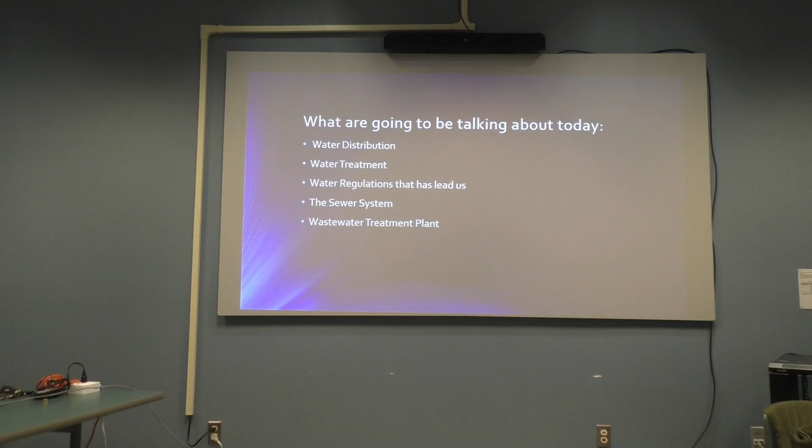So what are we going to talk about today? We're going to talk about the water distribution system, the water treatment, water regulations that's led us, the sewer system, and the wastewater treatment plant.

How does it work? Magic. Thank you guys for coming out. We'll sit down. Okay.

First thing we're going to start off with: there is no new water. I always relate this to land.

Growing up, my grandmother and Jim Wilford always said, buy as much land as you can. God isn't making it anymore. It's the same thing with water. There is no new water. There's water associated to land, so you can buy the water rights, but there is no new water.

So this is a very basic overview of the water cycle, and we're going to go through it. You'll see that we do not have surface flows that come down. We are predominantly groundwater. But this is the complete water cycle. Again, there is no new water.

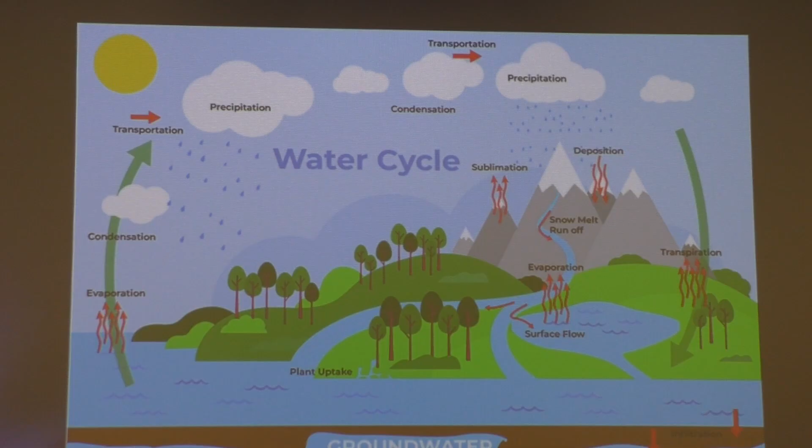How much water does Rosamond use? We are projected to use 2,400 acre feet a year. I'm a very visual person. Somebody tells me that, I have no idea what that means.

So let's do the math. An acre foot is 325,851 gallons of water. So if we do the math, that's 782 million gallons of water. That's a lot of water, but I still don't quite understand how much water that is.

That's enough water to fill the Rose Bowl 9.25 times. And that's what our town uses in a year. Where does our water come from?

Like I said, we use predominantly groundwater. So the aquifer is between the surface and impenetrable rock, and it comes up through wells. This is very basic, I did not go into great detail. We're going to keep talking about this.

We also, down at the bottom, a little asterisk - there's always asterisks. In the case of emergencies, we do have access to Antelope Valley East Kern Water Agency, or AVEK.

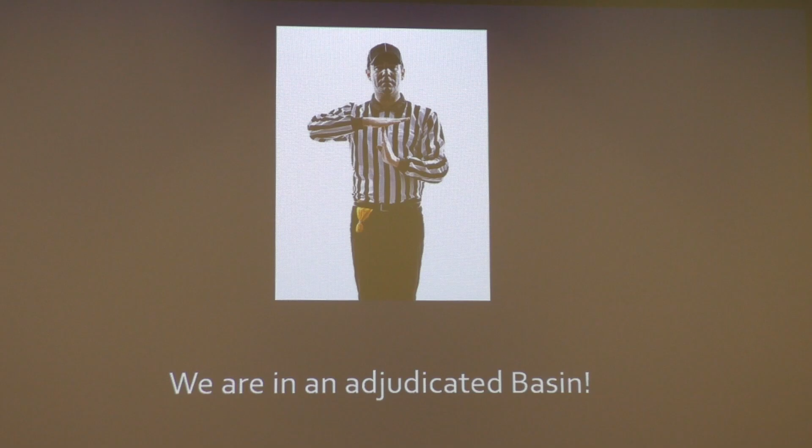Time out. We're an adjudicated basin. What does that mean? People have read about it in the papers. We're not getting political, but we're going to talk about it real fast. What is an adjudicated basin?

In 2015, the AV groundwater basin was found to be in overdraft. That means we were taking more water than we were putting in. So the water levels were going down. Some people's wells weren't deep enough anymore - the water was not going to the bottom of the straw.

Reduce historical groundwater pumping to sustainable production rights. Pre-adjudication, we were anticipating using 2,400 acre feet. At the end of the judge's ruling, we had 404 acre feet. That's how much water we were allowed to take out of the ground. So we were in a deficit - we didn't have enough water.

And it's a ramp down period, which means at this point you're going to start going down to this point. Good frame of reference.

Again, I work for Lancaster. 404 acre feet is almost the exact same number they have just for the soccer field out in Lancaster, for that big soccer complex on 30th East. So our whole little town was supposed to use as much water as they use for watering soccer. Doesn't make sense, but there's a reason to it.

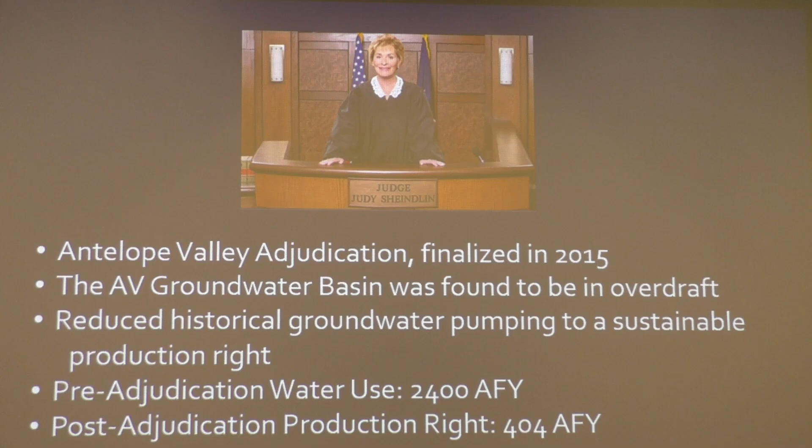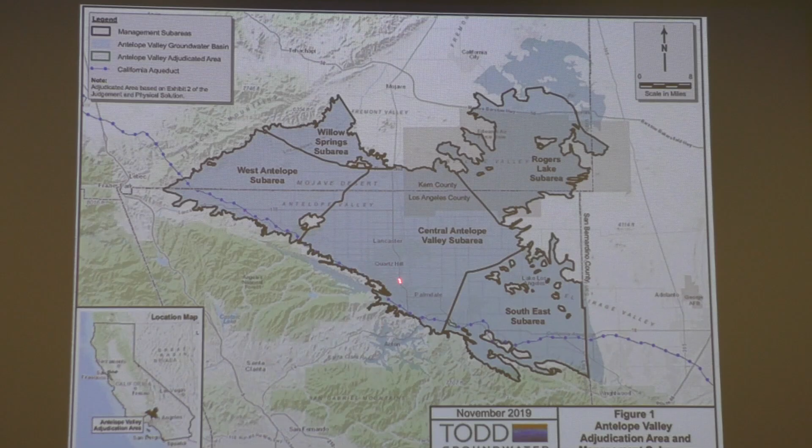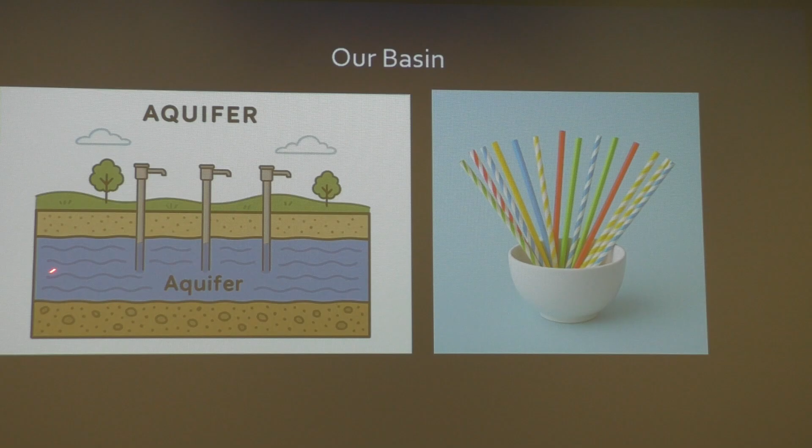So what is our basin? It's pretty much - oops, let me go back - it's pretty much a bowl, and everybody that's pumping water out has a straw. This is our aquifer. Every straw that's coming in is taking the water out.

Did you know, like I said, Rosamond had only 404 acre-feet of water rights? At the end of all of our totals, we were only allowed to pump 668, so we were in a deficit of 1,732 acre-feet.

So that means the magic wasn't going to work at some point. Your faucet wasn't going to come on, you try to flush the toilet, there'd be no water to push it down. So we needed to do something about it. But we'll get to that.

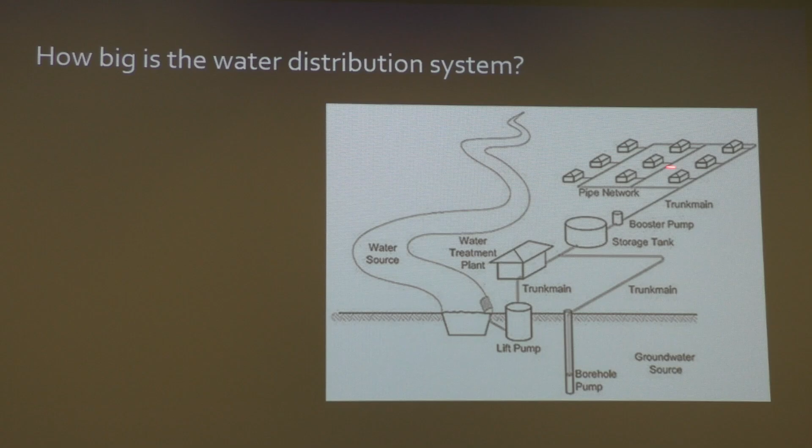This is how the water distribution system works. It's a very basic drawing to understand. Now, you'll see it does show a water source. We really don't do that here, but we do have wells, and then it goes into the treatment plant - we actually don't do a treatment plant here, I'll explain that later. It comes in, goes into our storage tanks, booster pumps, and goes out to your houses. So like I said, we have 103 miles of pipe and 5 tanks.

So this is a part of a pump, or a well. This is how we get the water out of the ground for you guys. You'll see this is the motor on top. It turns the shaft. This brings the water in through the sandy aquifer. So this is your aquifer here. The water comes through, and this spins, sucks the water up, and comes out.

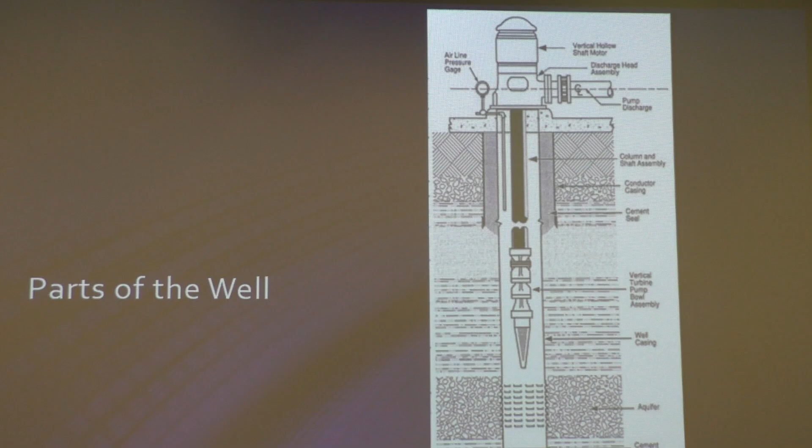And this is a casing. This is a sanitary seal. It's about 50 feet deep, and it goes on each side. It's so that pollution and stuff can't come in through the top and make our water nasty while we're pumping it out. We have 2 wells.

Well number 9 is the main well. It's the well that's doing most of the stuff, supplying most of the water for Rosamond. It was drilled in 2005. It's 520 feet deep, and it has a 16-inch casing, that's a 16-inch diameter, and it does anywhere from 800 to 1,550 gallons per minute.

The thing there says VFD, which means variable frequency drive, and it's just kind of like turning your faucet on. Do you turn your faucet on full blast, or do you kind of ease it on? Depending on what we need, how much water we need, we can set the pump to come on high, half, whatever it is. So it's a variable frequency drive. It's so the power doesn't go from 0 to 100, we kind of ramp it up. And this one is located at 58th Street West and Gaskell Road.

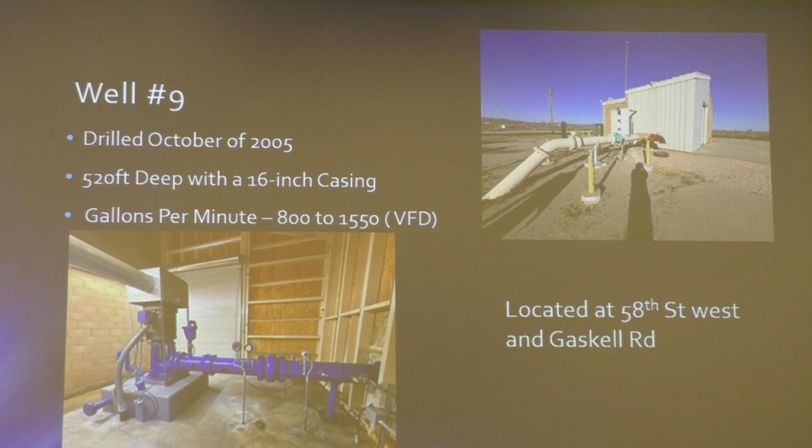This one is well 8. This used to be our primary well until we got well 9. This one was drilled in 1993. It is also 520 feet, similar to the other one, and this one's a little bit smaller. It's got a 15.5-inch casing, and it's 600 to 1,200 gallons per minute with the VFD. This one's at 47th and Gaskell.

Now, this one is only used during peak demand. What does peak demand mean? It's only used during the summer when people are watering their grass and playing on the slip and slide and everything. For 9-10 months out of the year, well 9 can handle the whole system. But when we get in the heat of the summer and everybody's watering their grass, we have to turn this one on.

What is treatment? So we do treat the water, but it's not like a treatment plant. We actually use chlorine injection, which is actually bleach, and it treats the water. To explain what that means: we dose the chlorine for disinfection. The demand is how much chlorine is used for disinfecting in the disinfecting process, and the residual is how much chlorine is remaining to prevent bacteria growth. So we have chlorine at both pumps, and when it comes in, it cleans the water as it comes through, and then it also goes all the way up to each end of the water center, and it keeps the water clean as you guys are using it, so that if water sits there for too long, it degrades and can grow bacteria. But since we have chlorine in there, it keeps it clean.

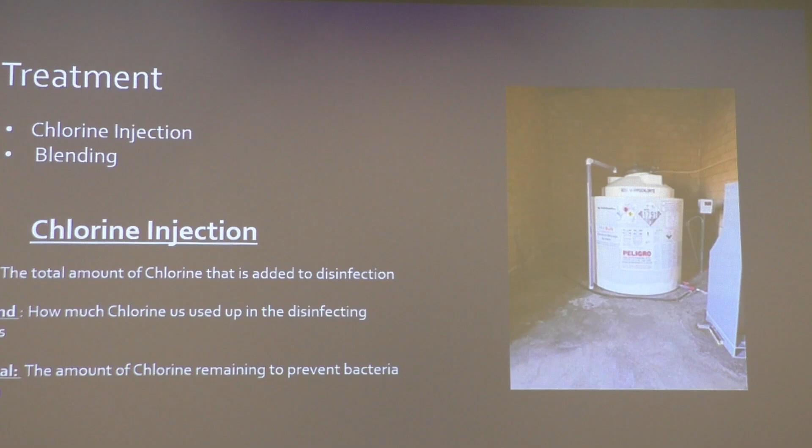Nobody's busting their pillows out or blankets falling asleep yet? I'm trying, guys. Okay, so here's one that I got to explain.

This one is called blending. It is a part of treatment. What it means is if your water, like this well, is high in some level, some form of bacteria, arsenic, or another one we're going to talk about in a minute, but this one's low, you can blend them to achieve that goal. So we do actually do blending when well 8 comes online, because it's an older well, so it's higher in other levels, but it blends with well 9 to meet the state requirements.

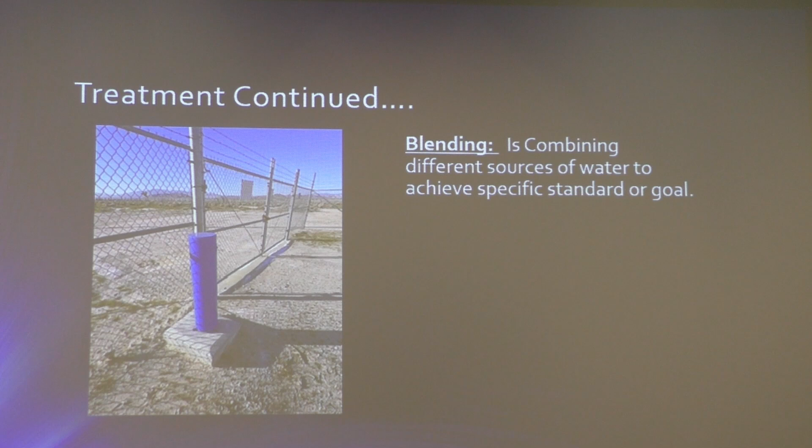Here's going to be the good one. Who got the letter in the mail about chromium-6? Okay, everybody got it. And not just Rosamond, Quartz Hill, Lancaster, Palmdale. I'll explain it. So everybody sees chromium-6, and this is what they see. They see Erin Brockovich, we're all going to die, there's cancer.

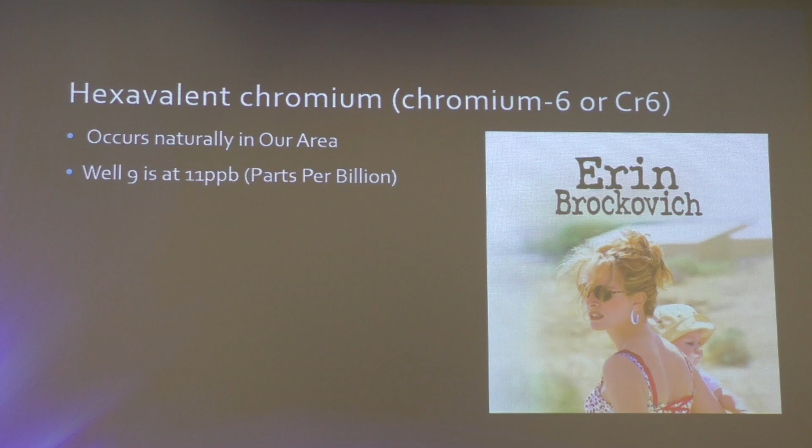Actually, in our area, chromium-6 occurs naturally, at 11 parts per billion. So out of 1 billion parts of water, 11 of them have chromium-6. Hinkley was at 580, and that was due to pollution, not naturally occurring.

California has changed their MCL from 50 to 10. So until last year, we were completely compliant, no problems. Now we're 1 point above. The EPA, the federal level, is at 100 for chromium-6 and chromium-3. So if we weren't living in California, living anywhere else in the United States, we'd be fine by a lot. But you know how California is.

They go to the extremes. My suggestion would be do your own research and look into it.

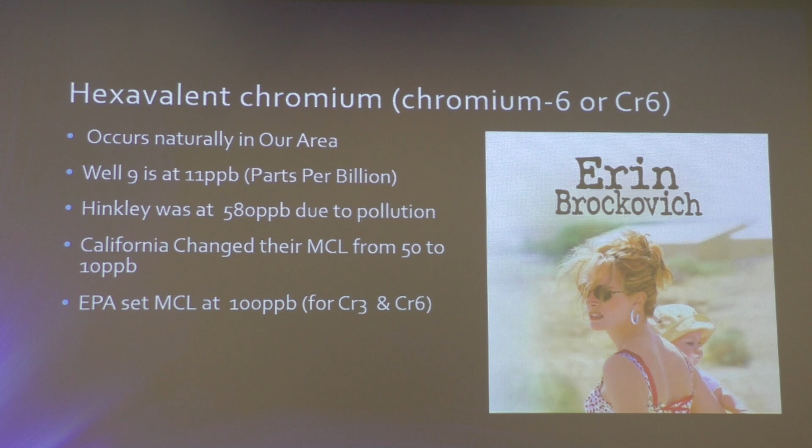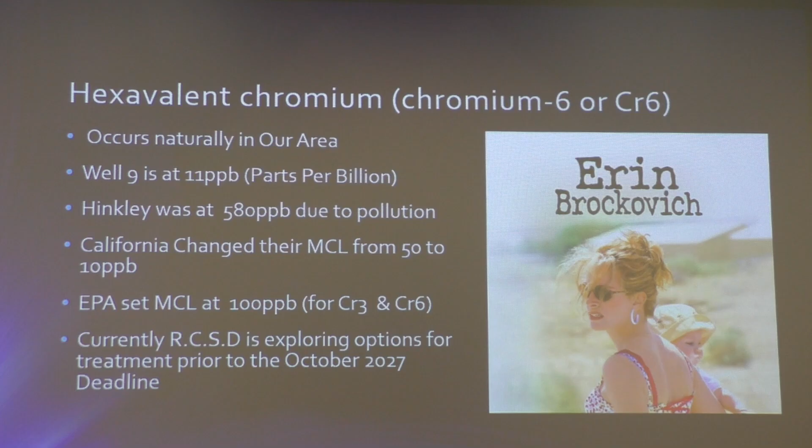Currently, RCSD is exploring options for treatment prior to the October 2027 deadline. So we are in compliance, and we're working towards that being at least 1 point lower by October 2027.

And then you've got fire hydrants. Fire hydrants are not on meters, because it's against the law to meter fire hydrants.

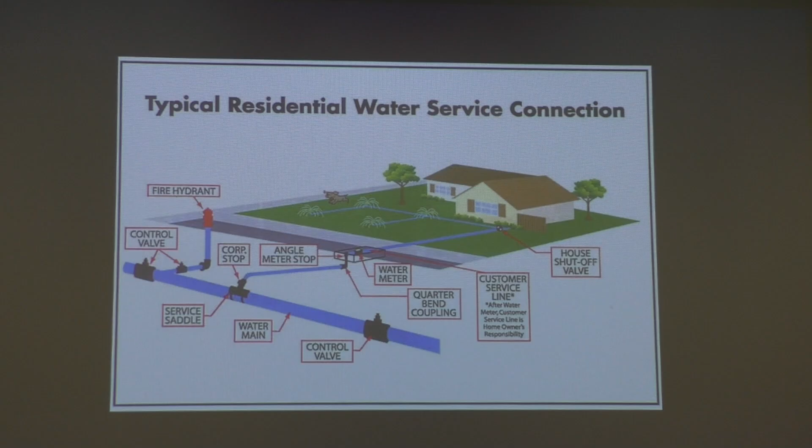The next one I'm going to talk about is your service line. Those are generally either copper or poly.

So if you're driving down the road through a neighborhood and you see that square patch in the road, like some asphalt that's different than the rest, that means there was a leak. Either something damaged it, like foreign material from during construction of the housing project, or somebody was digging in the street to run a power line, since we don't have fiber optics here. They can hit it, or backfill with dirty dirt, which works its way loose as trash trucks drive over it, cutting a hole in the line and causing a leak. So we either have copper or poly service lines.

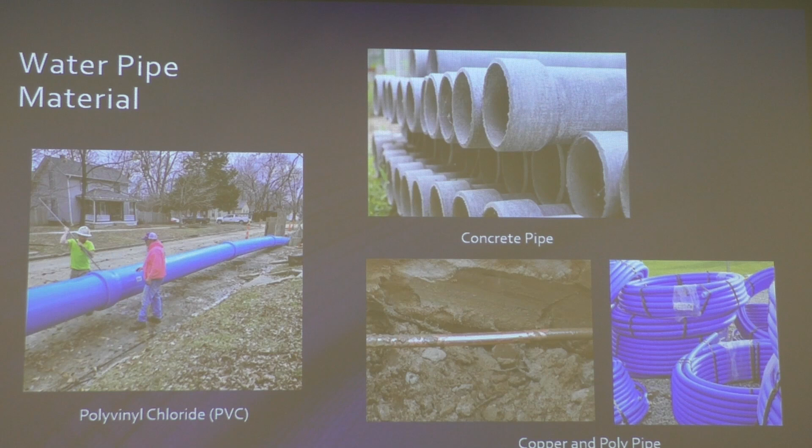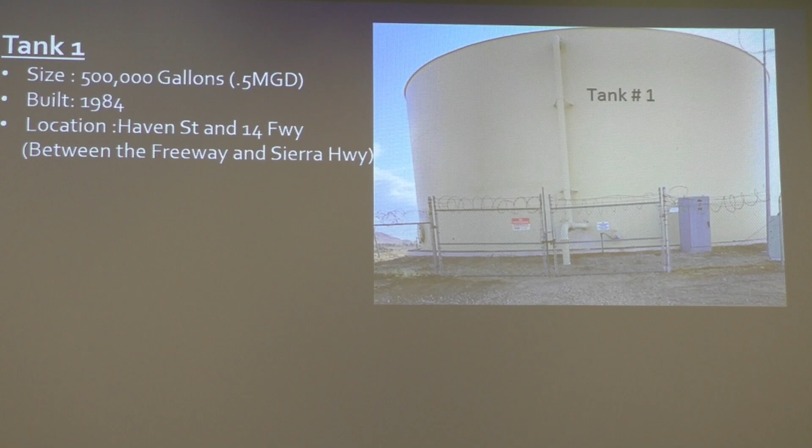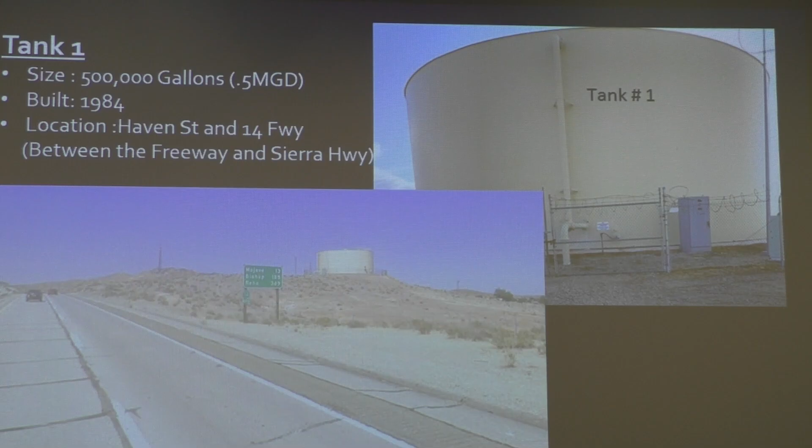All right, let's talk about tanks, the exciting stuff. This is tank number 1. It's not the oldest tank, I'm not the one that named these, but they call this one tank number 1. It's 500,000 gallons, built in 1984, located off Haven Street and the 14 freeway, between the freeway and Sierra Highway. Point of reference, you're on the freeway, that's the tank to the right.

Tank 2, I could not get a good picture of it because there's a big mountain in the way, and Google Earth doesn't drive up dirt roads. So I referenced tank 1, and that's tank 2. This one's 1 million gallons. Again, tank 2 was built before tank 1, in 1977, and I did not fix the numbering.

That's not Haven Street and the 14 freeway, I need to fix that. But it's right over here, this is 20th Street up here.

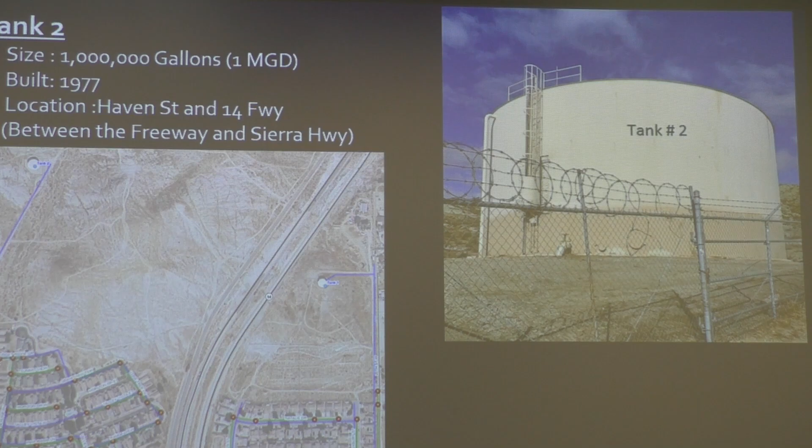Tank 3 is one of the biggest ones we have. It's 2 million gallons, built in 1990, at the north end of 30th Street West, behind the high school.

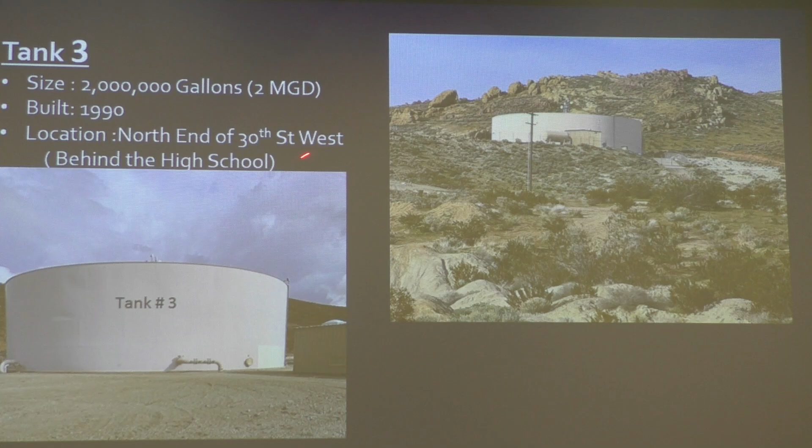And then tank 4 is at the top of United Street, or 10th Street West. That one's up there. It's 1 million gallons, built in 1990, and it serves a higher elevation. So the pumps, which are way over here, would have to be running constantly to make sure the water can make it up this hill all the way to here.

So what they do is, for this housing tract and other higher housing tracts, the pumps fill the tanks at nighttime while you're all sleeping, not using water. They fill the tanks up, and then when everybody wakes up and wants to take a shower, flush the toilet, do laundry, the tanks help support the water system. So the pumps stay on and keep supplying water, but the tanks slowly drain down so we can make sure you guys have enough water so the magic keeps working.

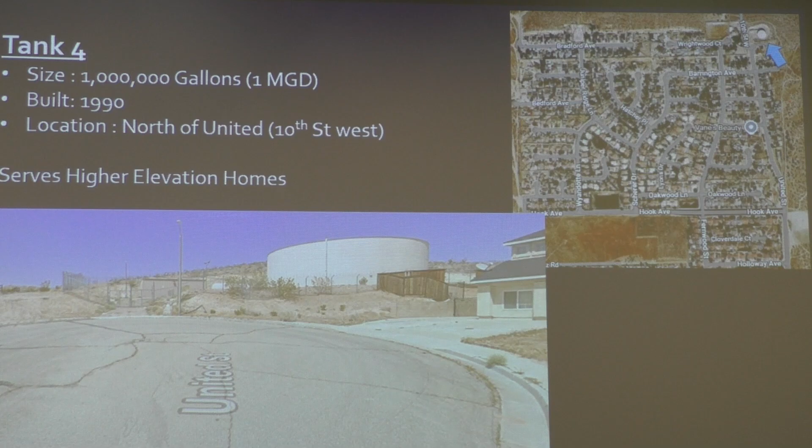Does anybody know what the purpose of tank 5 was? There was a proposed tract in 1992 called Desert Highlands, 1,500 homes, and they were going to build on the backside of the mountain. It was going to be a golf course, 1,500 homes, a gas station, a whole thing. And they put the water line in and the tank in and never used it. So it's been out of service until this last year. We just started putting it back in service. We have one customer on it right now. And in the future, there's going to be a whole housing development on it that's existing. They're coming online, off their small little personal wells, and they'll be coming online to this.

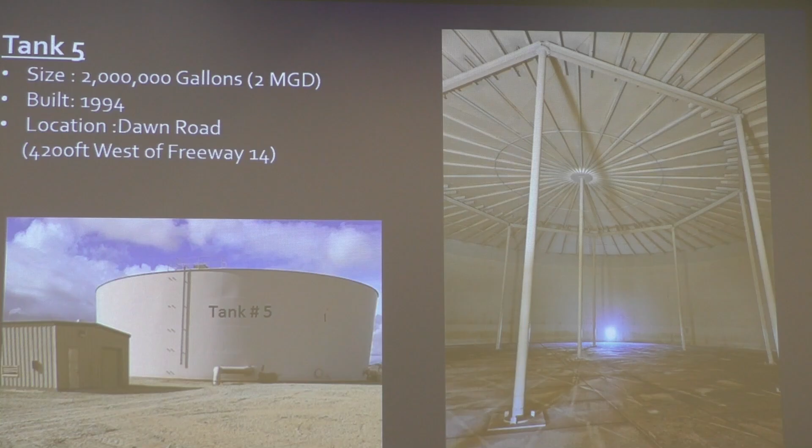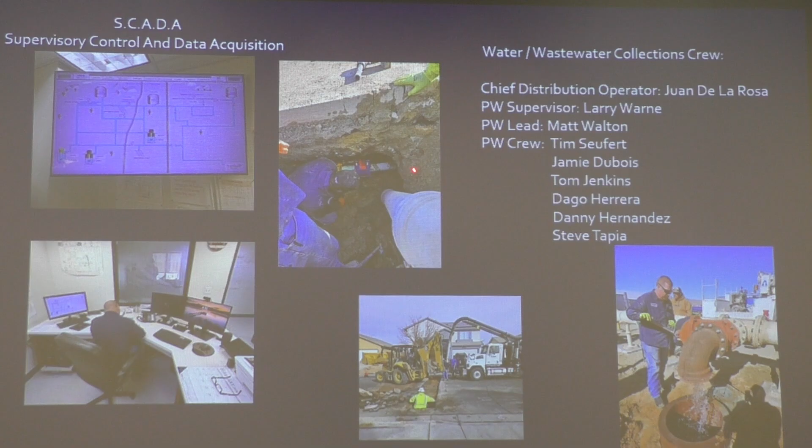And then Larry Warne is our supervisor. Matt Walton's the lead. And then this is the crew: Tim, Jamie, Tom, Dago, Danny, and Steve Tapia. As you can see, this is them working on well 9 a couple months ago, fixing the valve. And then this here is actually them doing one of those service line changeouts like I was talking about. They had to do a complete one, so you don't see that normal little square, you see the whole thing. And that's a repair to a main line they're doing there.

Okay, so what does it take to become a water operator? You can start off with water distribution. It requires a high school diploma and a 36-hour contact water course, and then you take tests. As you go down, you need more courses, more experience, more on-the-job training before you can move on to the next one.

Juan, actually several of our guys are D4, so we can't go to D5 because our system isn't big enough, they won't let us. But we have 1 or 2 D1s, and almost everybody's either D2 or D3, and then our lead guys like Larry, Matt, and Juan are all D4. So that's required by the state for water distribution.

Water treatment has no required experience, but you have to pass the exam. And then you must have the T2 or T3 for water treatment to be required. The max we can get here is T3 in Rosemond, because again, we're not big enough, and we really don't do water treatment per se.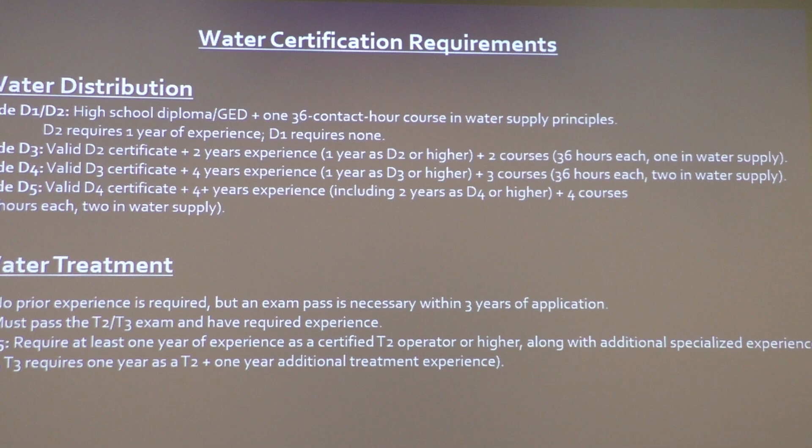Where can you get the classes? They teach them at AVC, the state does their own, and then there's a company out of Palmdale that I actually took my classes through. You go online, take the class, and they give you a certification. You turn it in to the state, and you get to go take the state test.

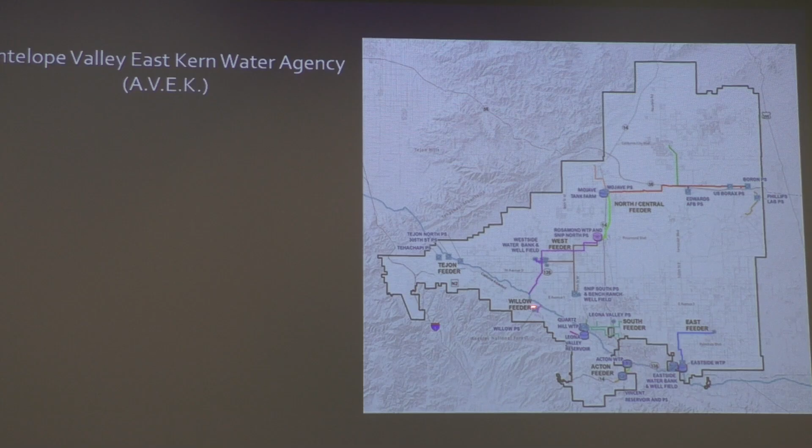In cases of emergency, we have AVEK, so I wanted to tell you guys where the AVEK water comes from. You'll see this is the AVEK service area here, we are right in here, and this is the aqueduct that brings the water down. Then they pump it out of there up to our treatment plant, the AVEK treatment plant.

Where does AVEK get its water? From melting snow that produces runoff, filling lakes and rivers in Northern California. How does it get to the Antelope Valley? Through the California Aqueduct.

Why doesn't RCSD use AVEK water full time? We did, that's why we got stuck with only 400 acre feet during the adjudication. When the judge looked at how much we were pumping out of the ground, we weren't, we were using AVEK water. So it was just bad luck, that's the time frame they used.

We don't use it because of cost and reliability. It costs us roughly, and these are rough numbers, under $100 to pump an acre foot of water out of the ground. If we were to buy the acre foot from AVEK, it's almost 800 bucks, because of the cost for them to treat it and deliver it to us. It's got to come from Northern California, maintain the aqueduct, the pumps, and the treatment. It's cheaper right now for us to pump it out of the ground. And our water quality, I've heard from multiple places and conferences, we have pristine water in the Antelope Valley.

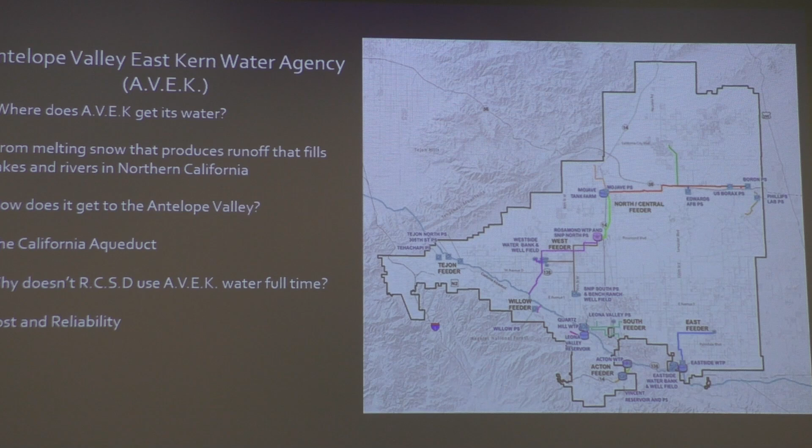And that's the Keith Dias water treatment plant that's owned by AVEK.

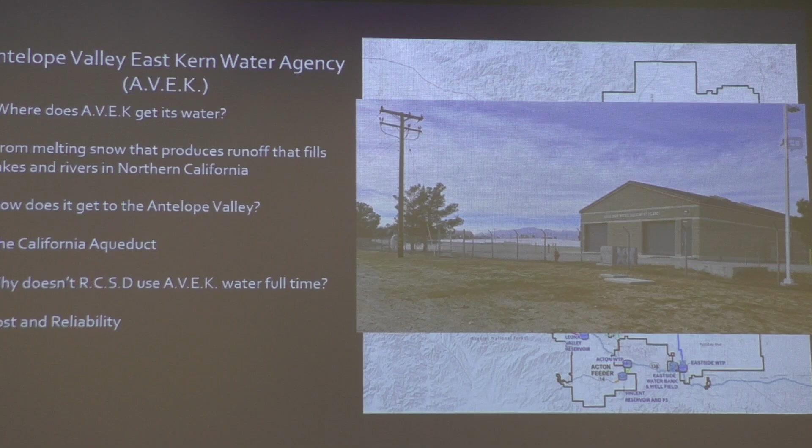All right, now the sewer system. This is what the sewer system looks like, and you see it's green. You guys saw the water map and it was blue. You ever see the spray paint on the ground, the blue marks, the green marks, the yellow and the red? Sewer is green, storm drain is also green, but sewer is green. Blue is water, red is Edison or power, yellow is gas. It's pretty self-explanatory, but this is the overview.

You'll see the other map had water going here, I didn't overlay them because it'd be hard to look at, but this is our sewer system. There's a red line over here, I'll explain that later. The sewer system works on gravity, it's not like the water system where it pushes it with pumps. It runs on gravity, aka stuff rolls downhill.

Very basic, this is the house. When you flush the toilet, wash your hands, or use the tub, this is your home lateral. You have a clean out, and we have a clean out right here at the street. This is called the upper lateral, and this one right here is the lower lateral, from the back of sidewalk, roughly the property line, down to the sewer system. This is the lower, this is the upper. This is all the homeowner's responsibility up to this point, the point of connection.

Some cities do take the part in the street, but that would result in higher costs and maintenance. How could I clean this part of your lateral without going onto your property? Then I've got to fix grass, concrete, everything, and most of the time the problem isn't even in there. So this is the sewer main line.

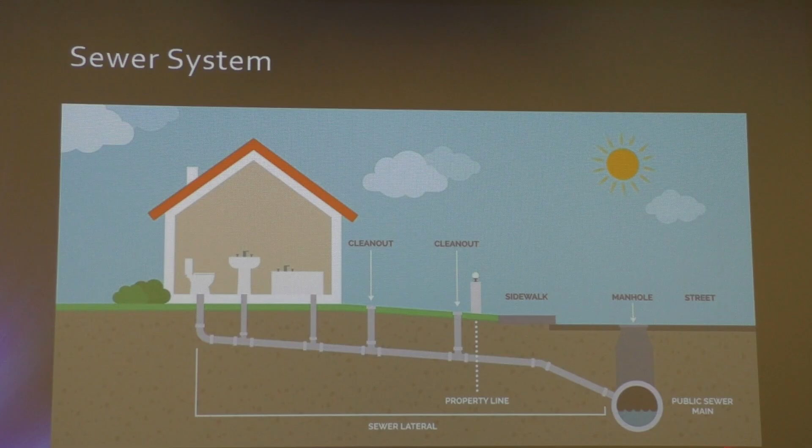These are how sewer manholes are made. It was an art back in the day. There are no new brick manholes, they're all precast concrete now. These are two different designs, this is called a concentric manhole, and this is an eccentric manhole. The way I remember it, this one looks like a cone, and this one looks like you put an E backwards in there.

But they both have a frame, a cover or lid, and then they have a frame or a ring. They call them the same thing. And then this is your chimney, and this is your cone, and this is your barrels. This is your shelf. Sorry, there's no Ninja Turtles.

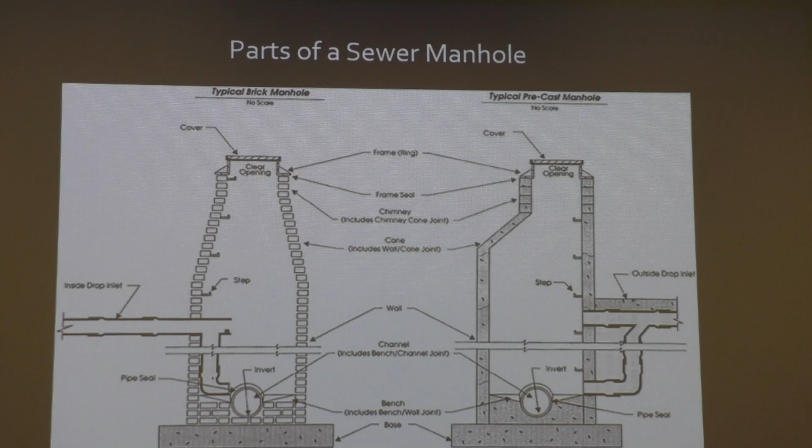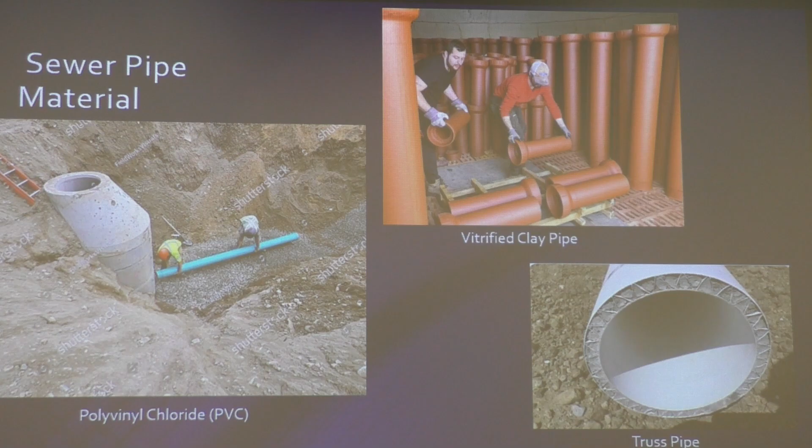Okay, so that red line I was showing you, this red line on Rosamond Boulevard and the Apple Blossom tract, this is what's called the last track, the last track before you get out to Edwards Air Force Base. They did not have the fall to come downhill.

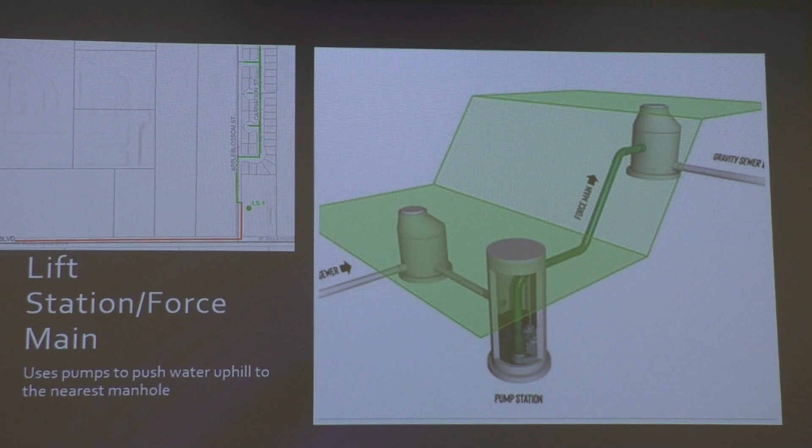Now the wastewater plant, it doesn't look like much. But it's got a very nice fence. Yeah, it does have a very nice fence. You want to keep people out of it.

So this is what it really looks like. The wastewater treatment facility, on average, receives 1.03 million gallons of sewage a day. This plant is rated for 1.29. So we're getting pretty full. We're filling up pretty quick.

So we're going to start here at the headworks, right there. What are the headworks? So the headworks is where all the sewer water comes in, and it goes through these. So it comes in through here, and it hits these. These are called bar screens. Take a guess what it catches. Rags, baby wipes, plastic, or other objects that should not be flushed.

Now, we talk about rags and baby wipes, and you say, Ben, it says right on the package they're flushable. Golf balls are flushable. Doesn't mean they should be going down the sewer line. If you flip the package over, they'll have a little picture of a guy putting one in the toilet with a no mark through it, and it says call your local jurisdiction. So they can still call it flushable. It doesn't mean it's supposed to be flushed.

So what happens, it comes in here, and it clogs this up, and then we pull it off and put it in the trash. But the lift station, it can clog the lift station. Pumps aren't designed to take flushable wipes.

The purpose of a flushable wipe is they have little nylon fibers in them, and what that does is supposed to prevent the accidental poke through when you're using it. Well, the problem with that is I saw a demonstration where they put it in an aquarium with water, and they put the flushable wipe in there, and then they moved it up and down on motors for a year. And they pulled it out, and it was still a perfect square flushable wipe. When your toilet paper kind of dissipates within a couple seconds.

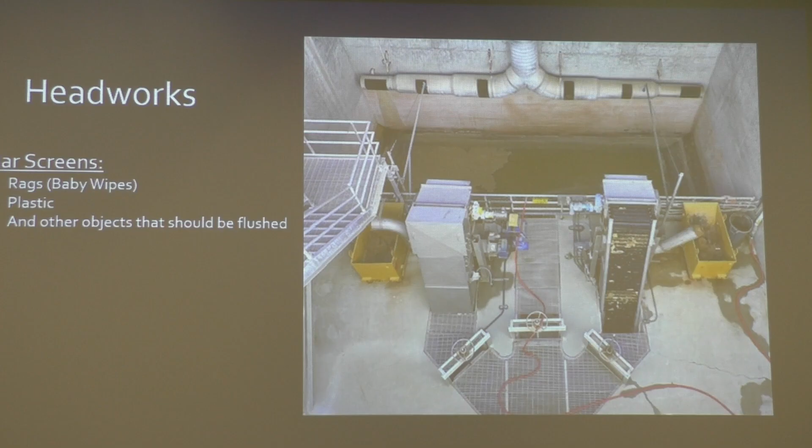There's three things you should put in the toilet, or down the toilet: poop, pee, and paper. The 3 Ps. That's it.

Okay, so this is the headworks. This is inside the headworks. So as it goes through the headworks and it comes down through here, so we have 4 pumps. So the blue pumps send the water to the overflow equalization basin, which I'll explain in a second, and the green pumps send it to the aeration basin, which starts the treatment process.

Now, if one of these sets of pumps goes out, we can use the other ones to back up, so we have redundancy. Because again, people aren't going to stop pooping. It's coming no matter what.

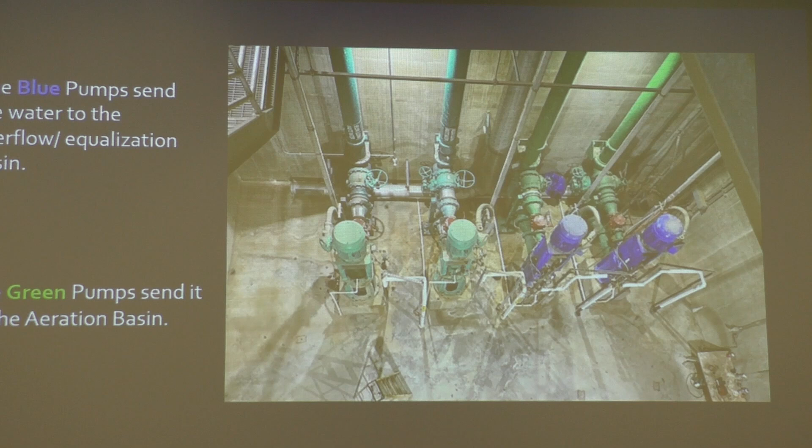So that is the equalization basin, just like its name. Just like water tanks, it all comes at once and we might not be able to handle it all at once. So we pump it out here when everyone is using a lot of water. We pump out half of it, and when everybody goes to bed we bring it back through. When there's not a lot coming through, it comes back through when the plant's slower. Or if there's an issue, like a pump goes down and we can't maintain, then we can pump it out there until we get the stuff fixed.

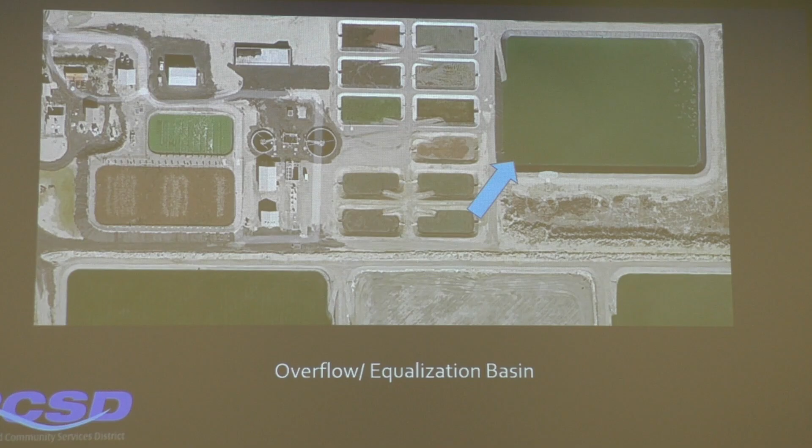Grit chamber. The grit chamber is a chamber which is underground, you can't see it, it's right in here. It comes in and swirls around, there's little fan blades in here. It swirls around and the heavy stuff falls out towards the end and slides down, and then it gets taken out and removed, and the clean water goes out. So all your eggshells, coffee grounds, stuff so small it can make it through the bar screen, this is where it ends up. It's another stage where we can catch it and throw it in the trash.

So the one we have right now is built for 500,000 gallons a day. I just showed you guys we're doing 1.03 million. So what does that mean? This thing is overworked, that's why it goes out to the equalization until we can bring it back through. At some point we're going to have to upgrade this, because as the population grows, the ponds don't get much bigger.

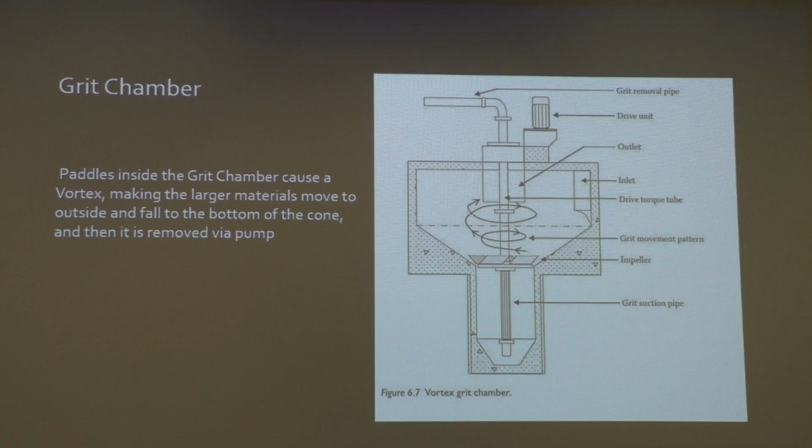Okay, so the aeration basin, right there. This is the generic terms: it's a lined pond with floating headers, suspended diffusers, assemblies, and blowers that deliver controlled dissolved oxygen levels. Ben, what does that mean?

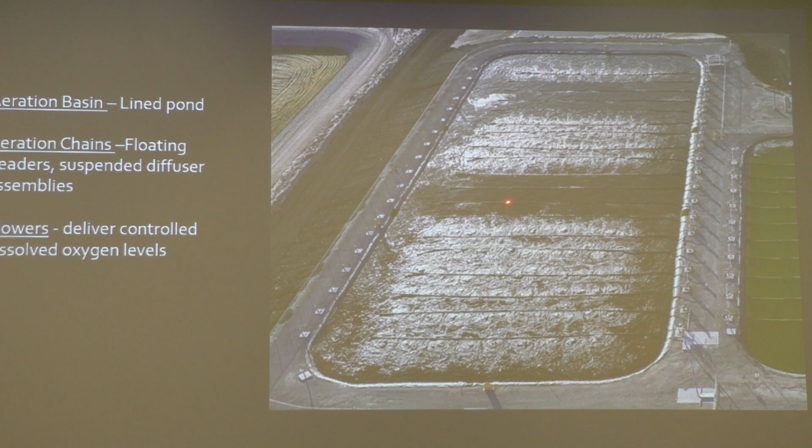So this is what's there. If you go back, this is where the air is turned on, this is where there is no air. It operates in 30-minute sequences, so this section will turn back into air and this one will go into no air. So as you see here, the influent comes in, no air, air, and this is what's under there, and it injects air. It converts ammonia into nitrate in the aerobic process, and reduces nitrate to nitrogen gas in the anoxic process. This is the magic that I'm still learning.

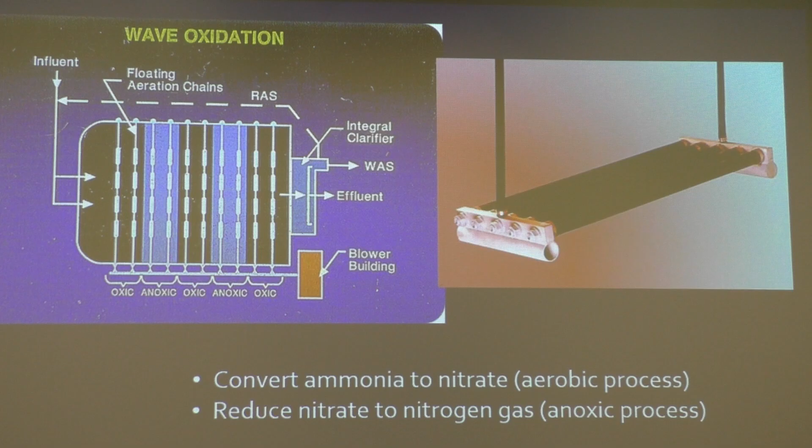So what is in there? These are water bugs, and what these things do is they go through and eat the nasties in the water. And these are the stalked ciliates, tiny microorganisms that attach to the surface with a stalk, and they group together and build. They bring them in and it clumps all this stuff up - they call it flocculation in the industry. And these little guys come through and eat the stuff off of them, and it helps clean the water.

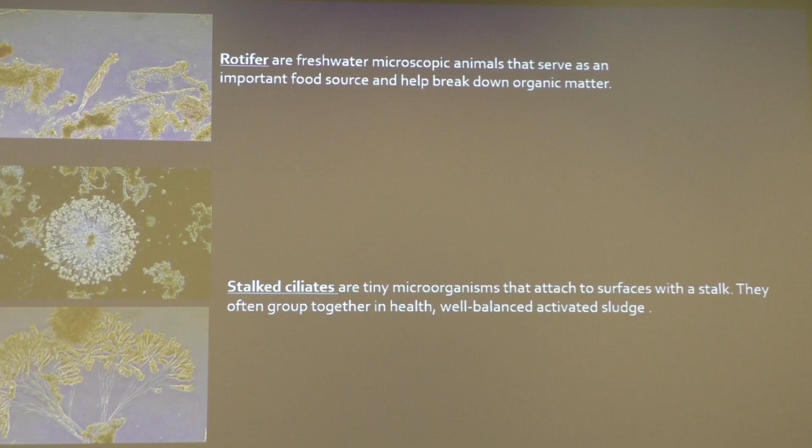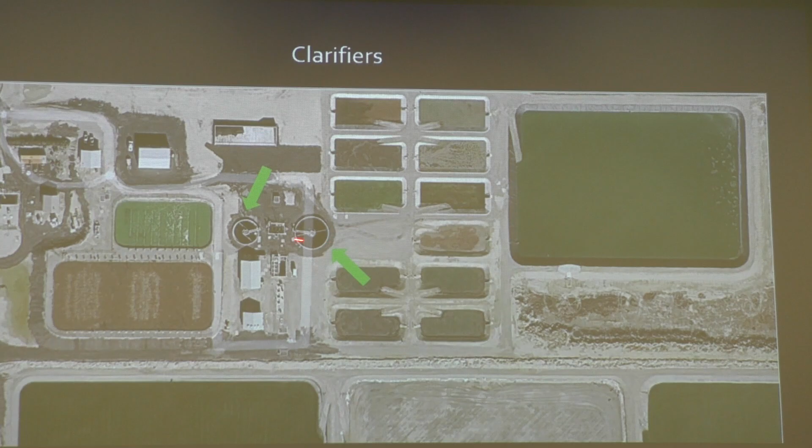Now this is a clarifier. After it comes through here and goes into the aeration basin, it comes through and goes into the clarifier. This handles 75% of the wastewater, and this handles 25% of the wastewater. These are the clarifiers, it's a 3-stage mechanism, so we're going to start in the middle, the red stage right here.

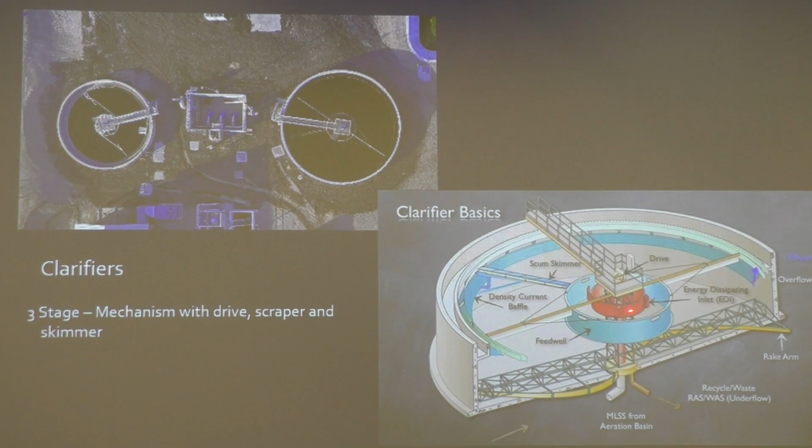If you looked at that water, you could not see through it - it's cloudy, it's nasty. The water comes up and goes through, the solids fall down, and the clean water goes to the next stage. It repeats, and the whole time on the outside there's a little skimmer going through, a scraper skimmer, keeping the stuff moving so it doesn't clump up, and that falls down to the bottom. The cleanest water goes over the sides of the weir and out to the percolation ponds, and the nasty stuff falls to the bottom and goes all the way back to the front of the plant. It's called RAS.

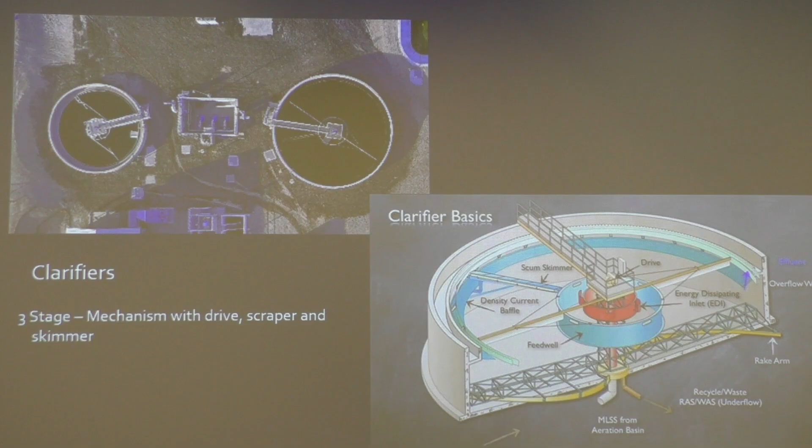The best way I could describe RAS is those little bugs that are still hungry and did not get enough food. The treatment plant operator told me the other day: if we went to your house and had Thanksgiving dinner, and after your house we decided to go to my house and have Thanksgiving dinner, we wouldn't be hungry anymore. So when they have too much of the Thanksgiving dinner, or too much of the waste, it gets pushed out to the drying beds. And that happens every day.

So the clarifiers make it clean, the solid waste falls to the bottom, goes back to the headworks and comes all the way back through the process. And when the waste gets so bad it can't get clean anymore, then we put it out in the drying beds like this here.

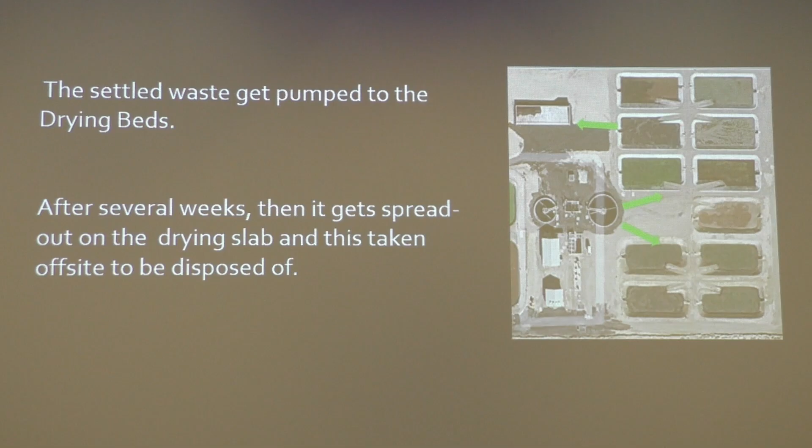After several weeks, it gets spread out on the drying slab, which is right here, and gets its final time to dry. The drying slab is recessed in like a little pond, and the water evaporates off while the sludge remains. We pull it off and put it here to let it dry out, because the cost to dispose of it is based on weight, and dry sludge weighs a lot less than wet sludge.

And then after the clarifiers, the settled waste goes to the drying beds, and the clean water goes to the percolation ponds over here.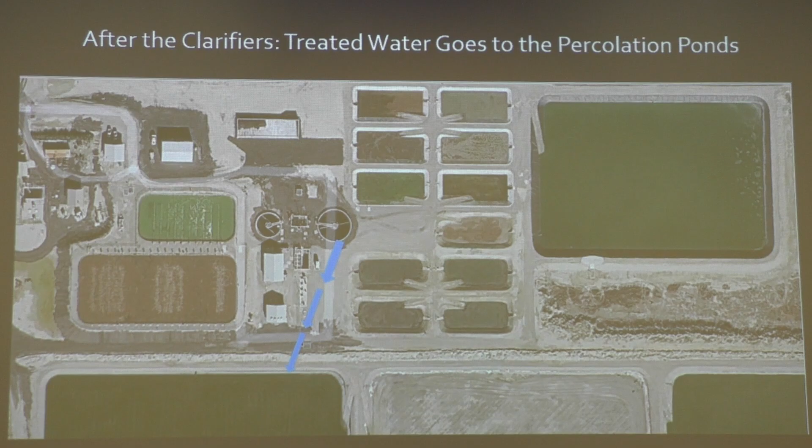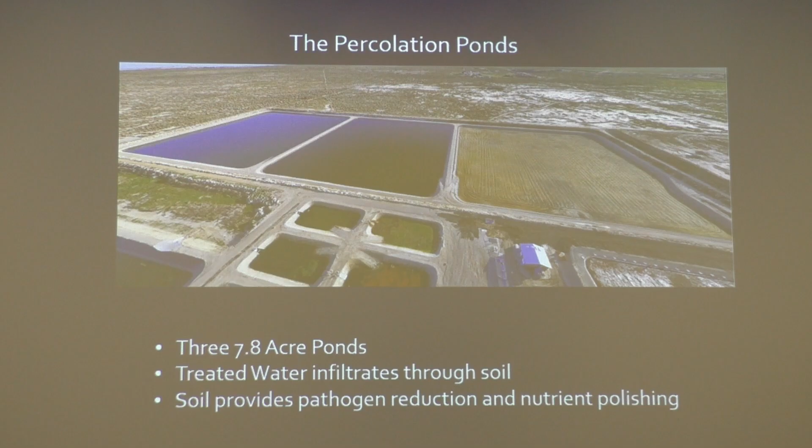What are the percolation ponds? They're 7.8 acre ponds. Treated water infiltrates through the soil, and the soil provides pathogen reduction and nutrient polishing.

So what that means is, remember how we talked about our water rights, how much we're allowed to pump, and that we purchased some water rights? Now we're getting a credit, and as we go through, we are in the green. We have 3,400 water rights we can pump each year, and we're only using roughly 2,400, so we have about 1,041 water rights we can use for other things. The treatment plant hasn't been on for more than a couple years, so we are storing these water rights.

What does that mean, what can we do with that? We can sell them to other people that want to water stuff or farm things. Or we can bank them and sell them to builders that want to come in and build new houses, selling the water rights to them cheaper than they could go out and buy water rights themselves. So we get our money back on that. But right now, we're just storing them, kind of like a reserve, trying to hold on to it.

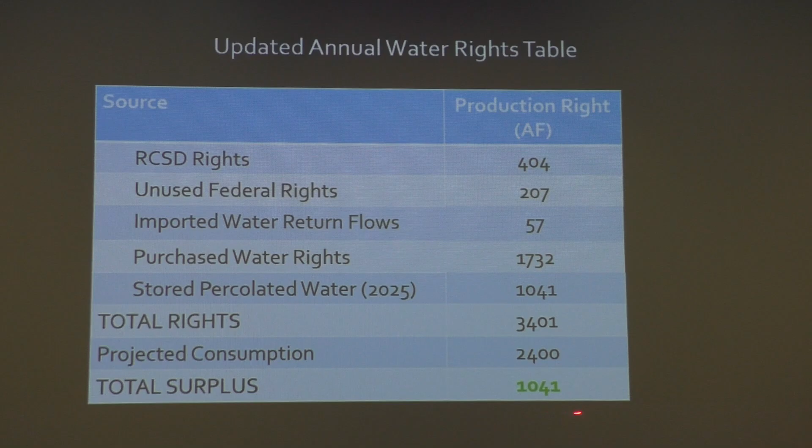Okay, let me talk to you about the wastewater treatment crew. That nasty brown pond we showed you with the air - those guys are floating in the middle of that pond working on those chains. That's called the bio barge. They pull each one of those chains up and work on it, making sure it works.

So the chief wastewater treatment plant operator is Ryan Becker. He's been with the district over 20 years. His right-hand man is Shawn, that's him right there. And then the two guys are Al and Brian - that's Brian right there. For a wastewater treatment plant, it's entry level.

So it's a little different than what you saw with water and distribution. You get hired on at entry level, you don't need any experience. But you're not allowed to go for your Operator 1 cert unless you have a high school diploma and 1 year experience in the field. Then if you want to become an Operator 2, you need 18 months of full-time experience as an Operator 1. So it requires time in the field working - you can't just go challenge it.

Ryan is an Operator 3, hoping to go for his 4 soon. But our treatment plant is only required to have a 3.

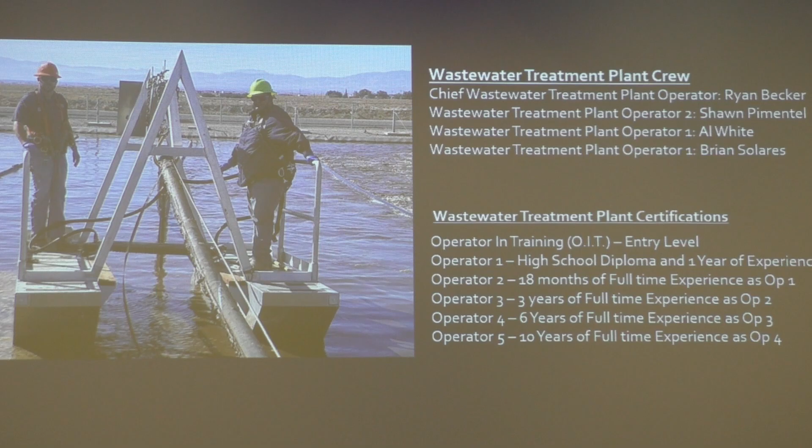Let me get a drink. Much better. Okay.

I probably went way too fast.

A real quick second, Mac.

You can't really see it, but up here there are these big ponds. Before it was a wastewater treatment plant, it was just an evaporation plant. What did that mean? All that water went out to these ponds and just sat there, and it would evaporate and go back into the water cycle, but it would take a long time. So we're just speeding it up — we upgraded the treatment plant and we're helping Mother Nature along. We're one of the leaders in the industry.

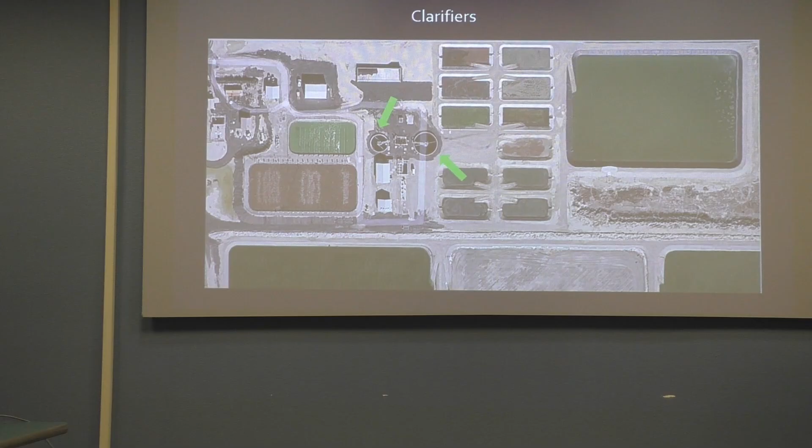Our GM, one of our other directors, and the wastewater treatment plant operator just went and spoke at a state seminar on this. We've had multiple people wanting to come out and look at it because this is kind of what the state water board is not pushing, but saying this is an option for you, because we're turning a waste into a commodity.

And like I said a whole bunch of times, they're not making any more water. So instead of letting it go out and evaporate, we're speeding it up and we're able to use it faster than evaporating and going out.

It's also technically cheaper because now the sludge mitigation—we said it would go into the drying beds, there were a couple drying beds, but not much. I think these are the original drying beds here and these are the new ones. All that sludge was going into those ponds. Every couple of years, we'd have to turn this pond off, go into this pond, get into the equipment, take all that sludge off, and go dispose of it. So now it's a more continuous basis, and this is as much as we've got to get rid of. It's an amazing project.

You mentioned that there's certain times of the day that you guys have to anticipate people using the water system. I read somewhere that during the Super Bowl, water companies have to anticipate people flushing during halftime.

100%. So the question was, during the Super Bowl, do water companies and sewer companies have to anticipate the usage? Yeah, because everybody's watching the game, they take a break—a bathroom break, run to the bathroom. So more people are using the water, more people are flushing. So yes, it has to be anticipated.